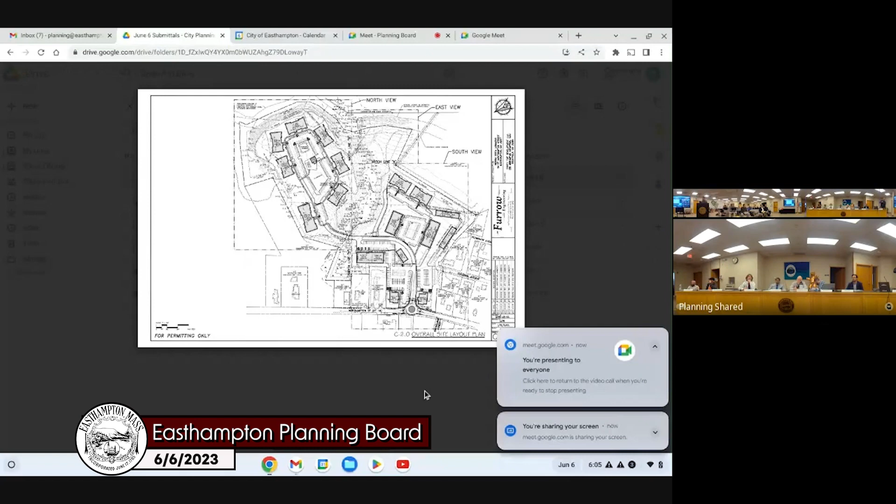All right, well good evening everyone. So since our last meeting, we've been working on some significant plan revisions in response to concerns that have been raised, as well as some feedback we've heard from the community. Last week we submitted a revised plan to the board, which incorporated all these proposed changes. So right now I'll just go through and give an overview of all these changes and their impact to the project.

First off, we removed about 14,000 square feet of retail space from this building right here. This eliminated the need for the truck loading and unloading area behind the building, so that space was converted from paved area to green space.

One of the more significant changes is we removed one of the residential buildings entirely. All associated paved areas were removed, including the driveway, parking, and walkways. It also eliminated the need for water basins in that area, since this is one of the areas that needed to be cleared for the development. Eliminating this building contributed to the reduction in tree clearing by 1.3 acres.

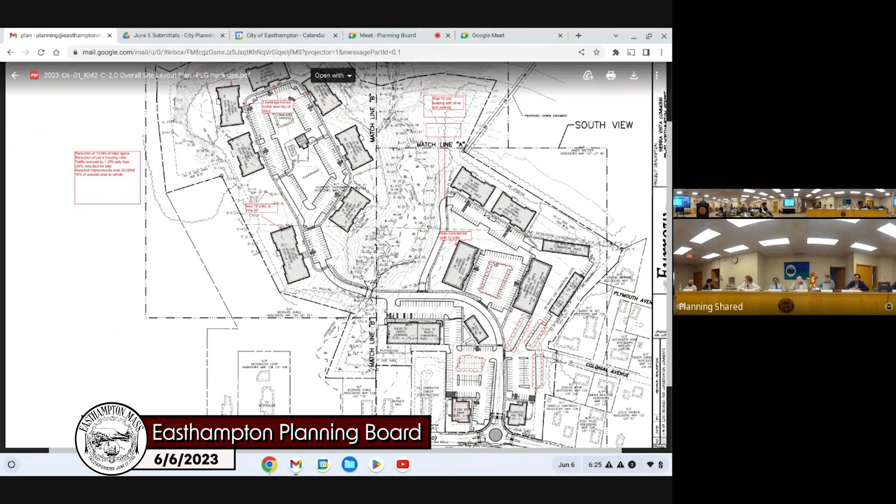Yeah, we also gave lots of thought in looking at the proposed layouts that the trust had put together. And again, in the grand scheme of things, when you have...

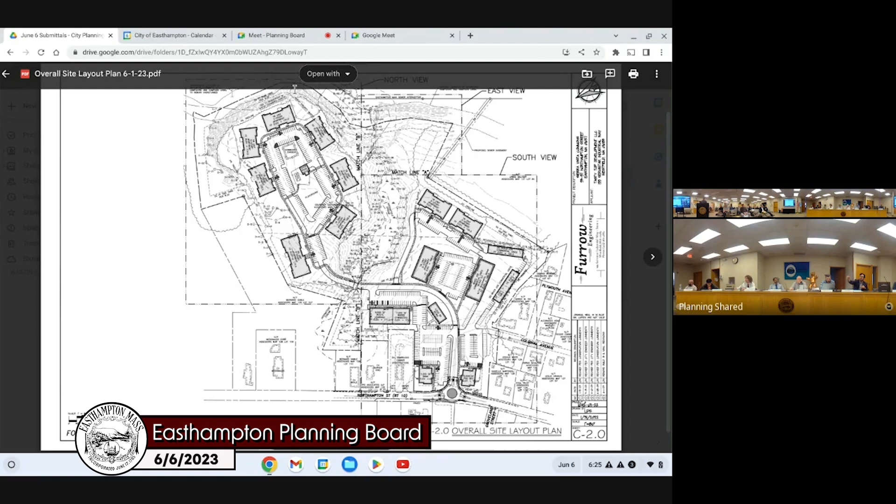You can leave that open, and then you can stop sharing screen on the middle tab there, where it's going at the top, going back to the meeting - right here, this one, up a little higher right there, and then stop sharing. Okay. Stop. Sorry, presenting. Well, thank you. Right angle on the bottom. Little Google - oh, there it's in, there too.

Okay, yeah, we looked at things that were proposed, and there's a lot of great work and a lot of great effort done there. When you can maximize smart growth by putting together a multi-story large building, you can get more density, but is that density who's it for the benefit of?

What we're proposing is nice oversized units, 18 in a building, 3 bedrooms, 2 bedrooms, around an open green space with a pool and a community garden and playground. And why can't those 100 families enjoy the wonderful Manhan River and its surroundings?

I'm here all day long. So it really is a matter of choices and the community's interest to create affordable housing, which we all know is a need, and to do so tapping millions of dollars of state resources in the process. Again, we appreciate and enjoyed working with the community to bring this together, but wanted to make sure we had a chance to respond to some of those questions.

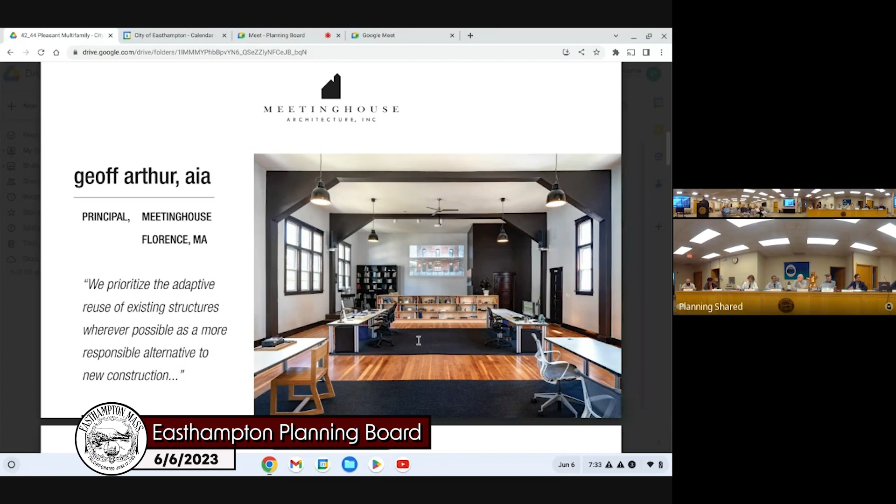Just a word about our firm. We're located in Florence. We're not a very old firm, but we work on very old buildings. We specialize in adaptive reuse, and we feel like not only for our environmental missions but for our cultural missions, the reuse of building stock is essential to our communities.

The store has been owned and operated by the family since the 30s. Retirement of the patriarch led to leasing of the store in the late aughts, early teens, and the retail space underwent some unpermitted alterations and was closed. I say building, I mean the retail space on the first floor. There are, according to the property card, 4 units upstairs, 2 of which were never built out, 2 of which were and are currently occupied. So there are renters in the building. Just to be clear, there's 2 empty spaces up there. It's on the property card as 2 empty spaces, but it's actually 1 big empty space. It was just never built out as 2 additional apartments.

Project goals: like I said, we're looking to transition from mixed use to residential only. The 2,600 square feet of ground floor retail would become 3 one-bedroom units and would also accommodate a small owner space in the back, for storage, an electric snow blower, upkeep, that kind of stuff. It's a very small room in the back.

Again, there's 2 existing second floor units that would remain, and the additional upstairs unit, open space that was 2 units on the card will be 1 big, 1 bedroom.

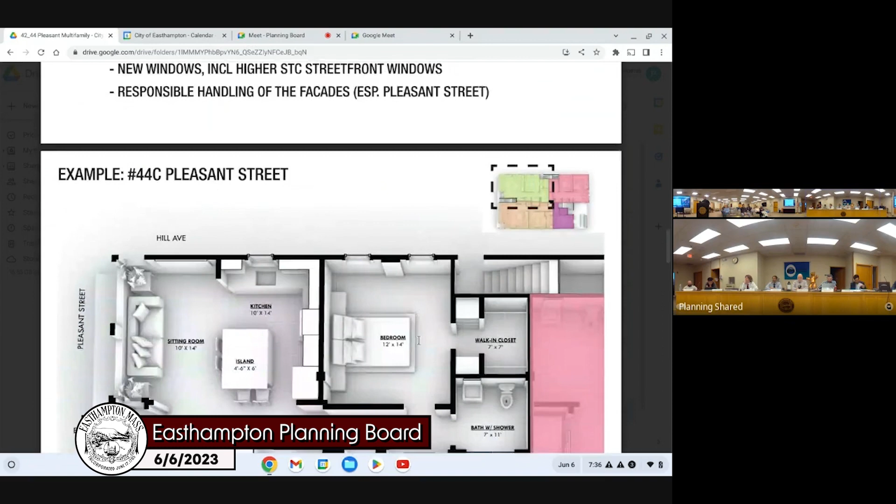This is an example of one of the units, the one on the corner of Pleasant Street and Hill Ave. Currently roughly half of the retail space. So it's a large 1-bedroom, and we put a lot of time and effort into laying these units out as well. Here's an isometric of the kitchen and entryway.

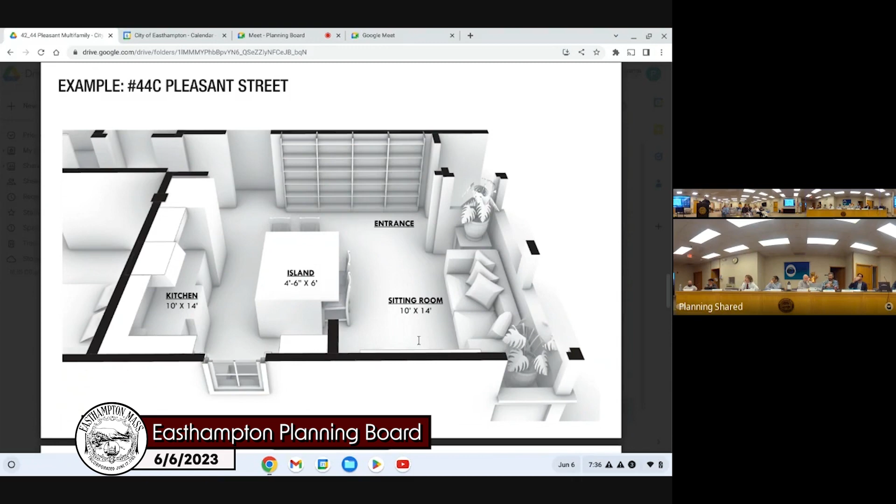And you heard me talk about apartments that feel like home. We went through an exhaustive design process with the owners, looking to make sure that there are home-like moments, that these apartments are not just quote unquote rentable, but are attractive.

There's some views of what it could look like. We're looking to retain the historic nature of the building, even though not much of the history of the building physically remains. We're recladding the exterior. We're looking to put back the storefront that was once there and give the building some character.

Site plan, it's worth talking about the actual changes that are happening outside of the facade of this building. Not much. We are basically going to be reconfiguring parking.

With the current uses, it's worth noting that with 3 spots dedicated to first floor retail, 1 per 1,000 square feet, plus 4 1-bedroom units on the second floor, plus a visitor spot, we're at 8 parking spots. The site cannot accommodate 8 parking spots, it's non-conforming. Our proposal is for 6 total units, 1-bedrooms, 1 parking spot per bedroom, plus a visitor spot, which is 7. 7 we can accommodate. The space that you see hatched will be the additional visitor spot, and that just needs to be contracted as a space that snow is cleared out of in the winter.

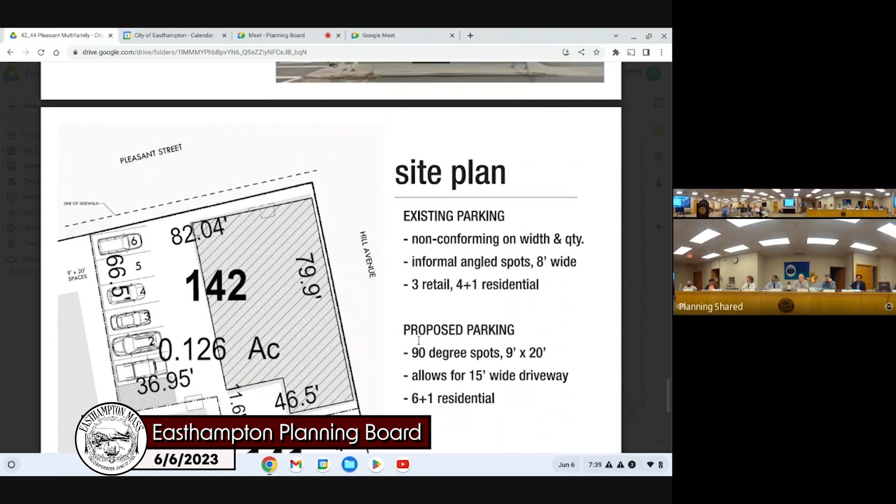So I have some updated drawings I'd just like to pass around. One of the concerns at the ZBA meeting was lighting the parking lot, how that would be handled. Hot off the presses, so I just wanted to share them.

And just for our record and people here, I'll explain what you've been doing at the ZBA, why you were there first. Sure. Again, it's an existing non-conforming property. The building was put up well before setbacks, and we're over those setbacks. Like a lot of the buildings in Old Easthampton, they abut the sidewalk. And since it's a change of use on an existing non-conforming building, we're doing the rounds. We started with ZBA, and just the way the planning worked out, we're here at planning board.

Thank you. The ZBA did add a condition for lighting. You had the text with me, but it was pretty boilerplate, just that it conforms to the zoning ordinance and lighting standards. Okay, so zero overlap of the property line, that sort of thing.

Right, so we're looking at angles for the shrouds. We're probably going to do goosenecks. They look good with the existing sort of storefront architecture. And the goosenecks have the advantage of being able to not just shade the bulbs, but also you can kind of dial in the angle so we can keep the light from splashing.

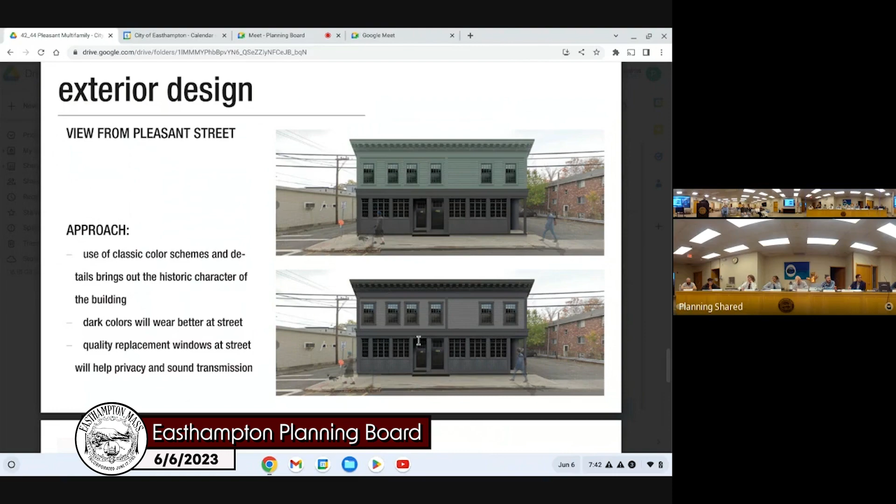They're all good. Can you go back to the parking diagram? Sure. I just want to know, it looks a little tight up to the edge of the building. There's a visualization of a truck there, and I'm imagining myself in it. Thank goodness most vehicles have cameras these days, because that just seems a little tight to me. Are you at all concerned there's enough clearance?

So these are 9 by 20 spaces, as they're supposed to be, and we have 18 feet to the building. I think the minimum for residential use is 15, and the maximum for commercial use is 24. So we're right in there.

Speaking from personal experience, I used to go here all the time. It's tricky, but not extremely difficult. Not the worst, a little tricky but fairly in the spectrum of reasonable. And it will only be people living there and their guests now, so at least it's not a public parking lot. I assume people will think about it and learn how to do it efficiently and safely. Or they'll get their bumpers repaired a lot.

Can you talk about that number? Oh, sorry, Ken, just real quick, is handicap parking required for this unit? During our code review, we found that an ADA unit is not going to be required as part of the renovation, and therefore we're not going to be doing an ADA unit.

What if someone uses a wheelchair and has a van with a wheelchair lift? Would they have a designated parking spot so no one else would park there, or is it first come first served? Yeah, number 6. At the sidewalk, perhaps. Or they would determine that they couldn't rent this apartment because they're in a wheelchair, which feels a little discriminatory. Right, I think given the relationship with the owners and nearby residences and commercial owners, they would work to figure something like that out. Okay, thank you, that's a good question.

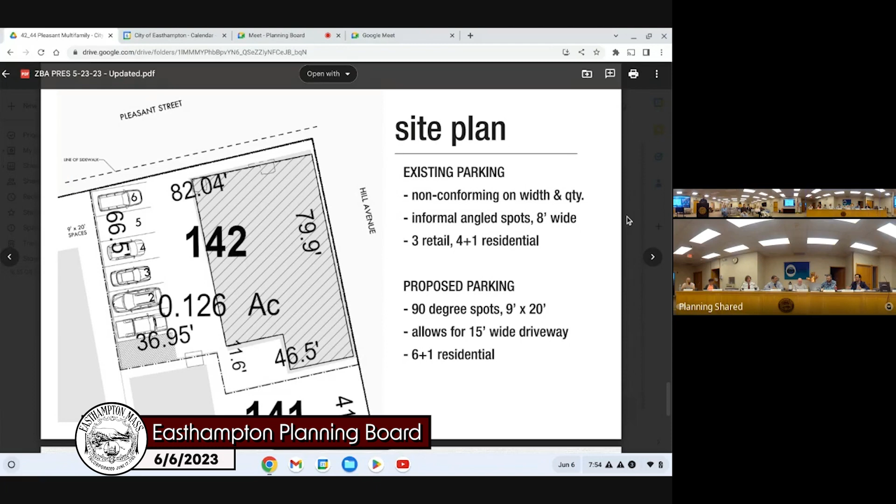Just one more note on the parking. I understand where the board is potentially leaning. Your requirement is to find that it has 1 space per bedroom, and there's 6 units, so that extra space is something that maybe it's good you're aware of, but you're not required. It's not a condition. There is on-street parking allowed, and technically in the zoning, what the snag we see is you have to make sure the parking is provided on site for the use.

That can't be shifted off to all the on-street parking, but this guest parking, sort of reasonable use by people who are coming to visit, is not a requirement. Correct. All right, I think we went through all the relevant findings, because we're not clearing anything and we're not affecting the water table or city services or anything, but I think the only ones we didn't touch don't apply.

Can you read that? Can you see? Can you zoom in a little bit and then we? Sure. Conformance with the provisions of city ordinances, we've done that.

Protection of amenities and abutting properties, amenities of offensive uses, with that. Traffic and safety impacts, let's cover that. Methods of disposal of sewage and refuse, drainage of surface and subsurface, we've covered that to the extent it applies.

Next. Means protecting wetlands, no, not an issue. Mitigation of adverse impacts on the city's resources, not an issue. Off-street loading and unloading of vehicles, we've got that covered. Applicant's efforts to integrate the development into the landscape.

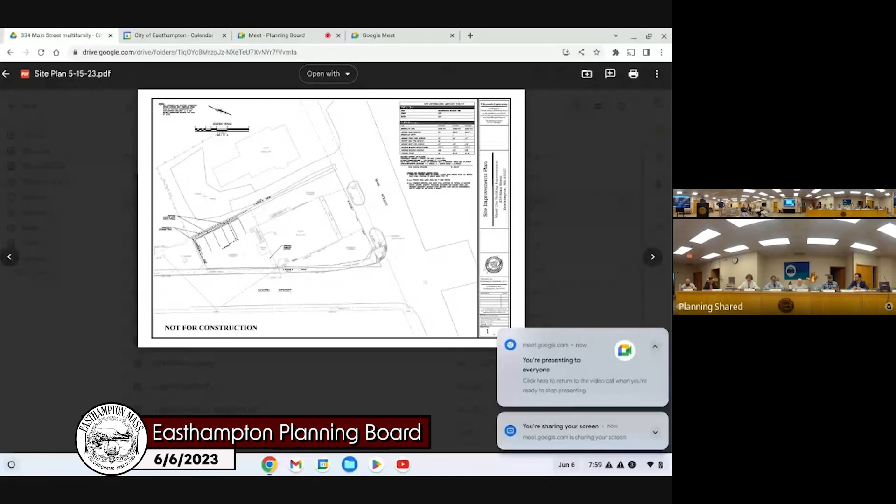All right, proceed. Hi, I'm Terry Reynolds, T. Reynolds Engineering. I'm here representing College Highway Variety.

What's being proposed is at 334 Main Street, to renovate the upstairs portion of the building. It is currently a very large four-bedroom apartment on the second floor, and downstairs is the College Highway Variety store.

It's a difficult site. Right now the parking up front is difficult and not delineated in any way—it's kind of show up, park as you can. Unfortunately, due to revisions over the years, Mass Highway put in islands and things like that. This used to be a site where people would back out into the road, come and go, and that is no longer the case. So now it's kind of haphazard parking in front.

The rear of the site has always been for the apartment, which is about 2,700 square feet, a crazy size, 4 bedrooms. But parking has never been delineated. So what's being proposed now is no changes to the variety store, but taking the second floor and converting it from a 4-bedroom single unit into 4 separate 1-bedroom units.

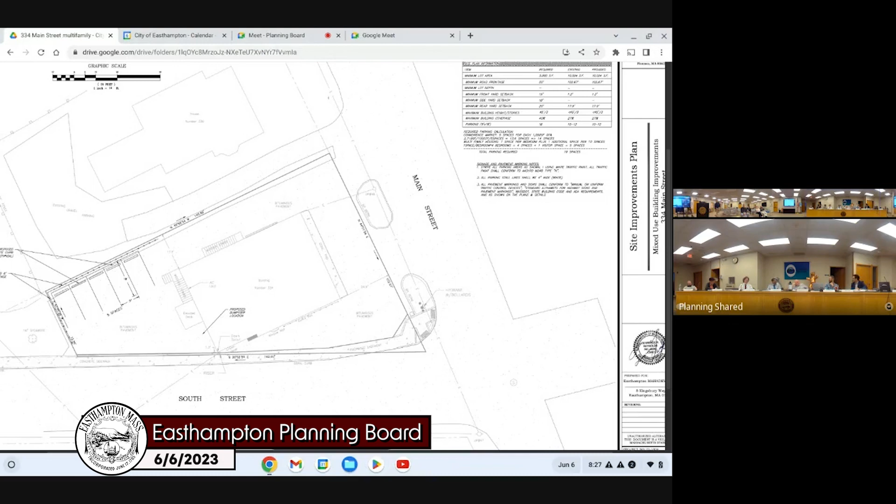Just roll through it, bring it up and roll. Roll it up again? That's it. Sorry, Eli, no, we gotta make them work. I know, that's last meeting. So I think everything was stable. Please bear with us as we make this happen.

We pride ourselves in being expeditious. All right, so conformance with the regulations, we know that one, we talked about that. No, I can't remember any of them, I showed off too much on the first one. All right, protection of city amenities and abutting properties, we talked about that. Minimization of traffic and safety impacts, that has been a topic. Methods of disposal of sewage and refuse, adequate means of protecting wetlands, watersheds and aquifers.

Mitigation of adverse impacts on the city's resources, covered that. Preventive measures for loading and unloading vehicles, we've covered. Efforts to integrate the development into the existing landscape through design features. Minimization of area over which existing vegetation has been removed doesn't apply. Consistency of development with surrounding area architectural style. Adequate measures to prevent pollution of surface or groundwater and minimize erosion. And ensuring that the use will not constitute a nuisance. So I think we've covered that.

Could I propose we go back up to, is it D, the one that deals with parking? I think that was really the biggest crux of the discussion. So, maybe it's not D, it's further down. I would like to propose that it's G, thank you.